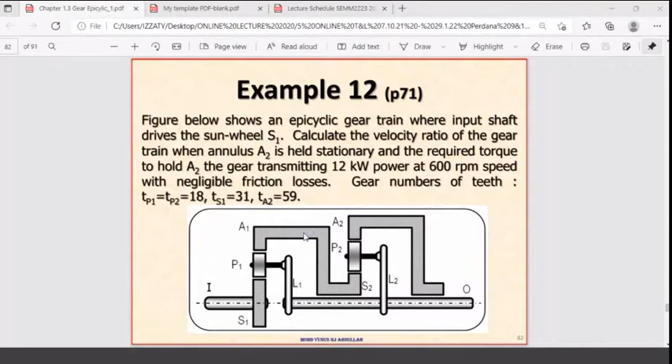Okay, let us now focus on this one. Before that, you have so many worked examples. If you look at your notes here, starting for example number 12, we haven't talked about this one. I know that, but you have ample time to read on your own because you have the solution with you in the books. So if I can, a very quick one, go to look at the solution in your book before we start solving the past test question.

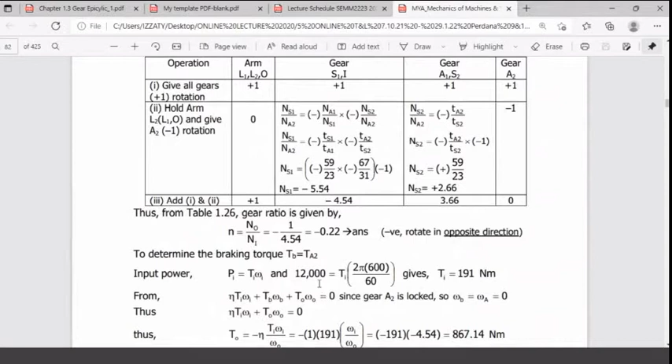You have this one, example number 12. You have the solution with you, and I really hope that solution will help you. And as I construct the solution, as I do the solution, I basically do it step by step, in such a manner that it will help you.

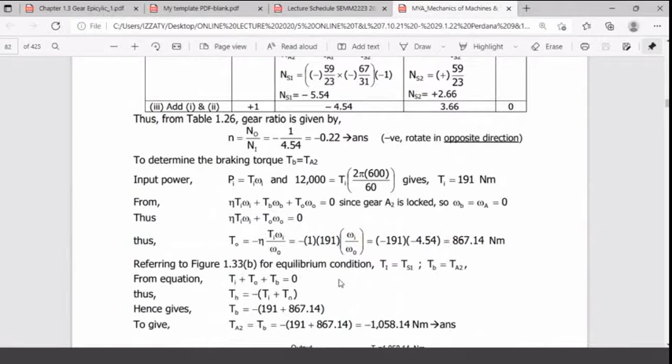And you have this one. This one is very different from other types of gear, as I mentioned earlier. Remember, typically the epicyclic gear will be longitudinally expanding on the x-axis, for example, or horizontally. This time around, it will be expanding radially, becoming bigger and bigger in size.

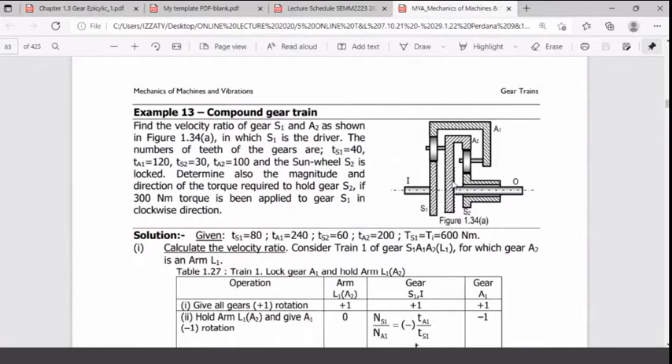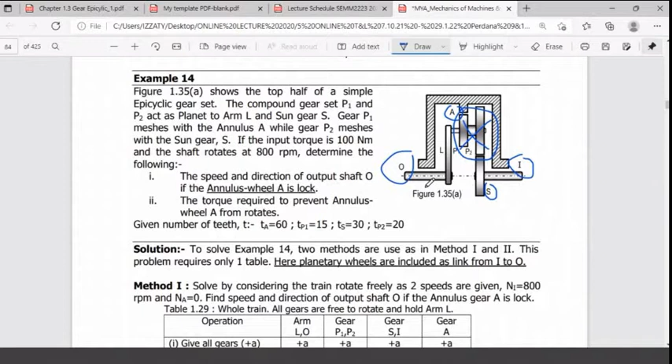And then you also have this one, another part, but this time around, the only connecting gear from A to S, or from O to I here, O to I or A to S, is via the planet. So you need to consider the planet. There is no other way. You need to consider the planet. So if you leave out the planet, for example, you will not get the result of the gear ratio typically. This one you need to consider - look here, consideration of planet.

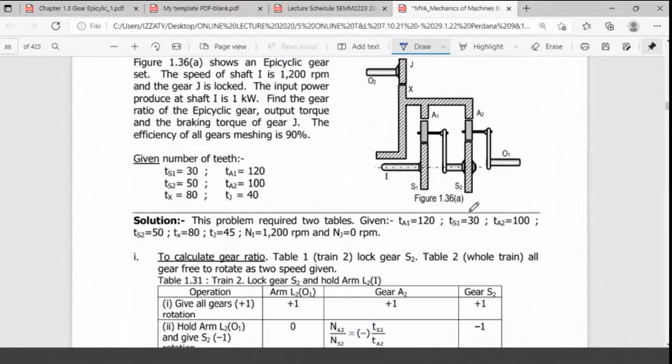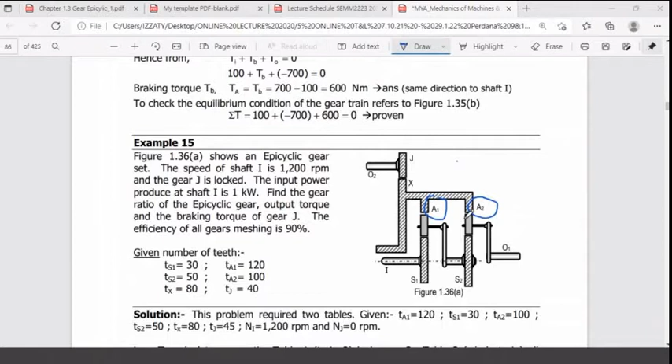And you have another one, this one. This one I think is also coming from a couple of years back in the exam question. You look here, A1 and A2 are part of a single body. It's very rare you find this type of gear where A1 and A2 are one unit, one single body. So you also have the solution with you, and I also provide you an alternative solution - it's not only one solution.

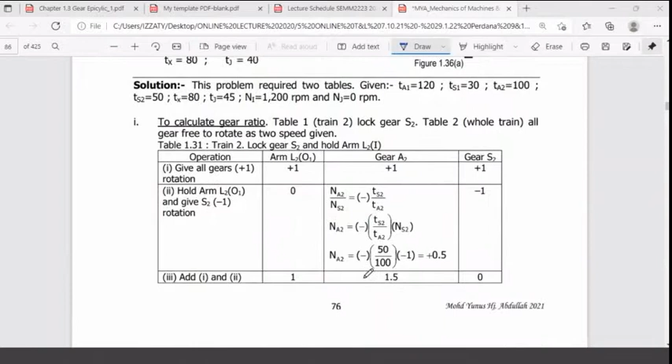And if you check this one, another one - this one is also special gear, also part of the exam question.

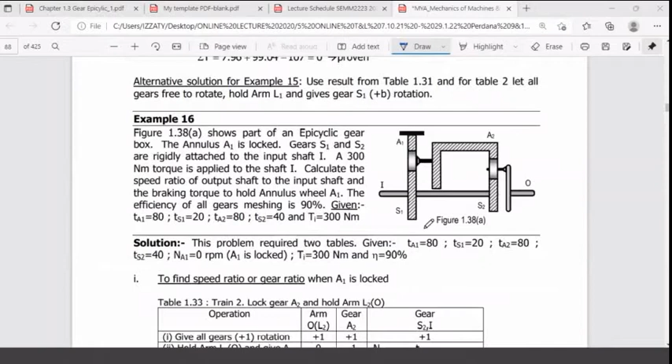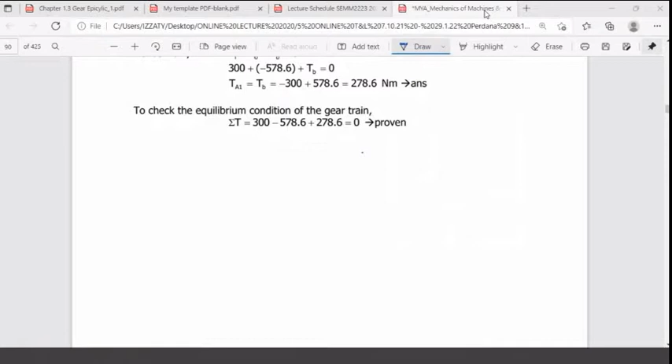This is a lecture schedule. Let me just check the lecture schedule. So I'm going to start with this one.

What I'm going to do is look at the test from the session of 2018-2019, semester 2. We do this one together, yeah? Okay.

Let me put this one. Hold on a bit, I'm going to close so many files being open here. I'm going to close one of the files. So now we focus on this one.

Okay, let's start now. Do this one together. The figure shows the top half of a compound epicyclic gearset with input shaft rotating at a constant speed of 900. This is the input rotating with 900 RPM clockwise, meaning that you have positive here.

So providing input power, they also provide you 5 kilowatt. Calculate the following: first, the speed and direction of the output O. So what would be the O here? We do not know what is O here, and also we do not know what is X here.

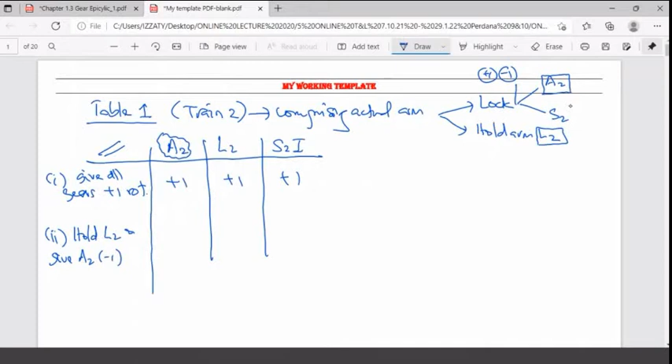So now I'm holding L2, this one becomes 0. So give A2 -1, -1. The minute I put this one -1, so there's no other possibility. This one becomes 0, this one now 0. So this one is +1.

Okay, so your work or your aim now, your objective now, is only to look or to define what is S2.

You have S2, look at here, give A2. So therefore, your NS2 divided by NA2 is equal to TA2 divided by TS2, negative. Remember? And you simplify, solve and simplify TA2.

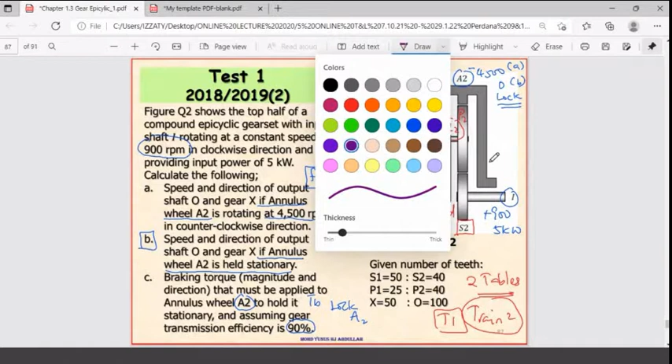And you go back to the parameter, they provide you as such. I left one step. You have to read this one very carefully.

As they provide you planet, this one, you need to use equation one. Remember, TA is equal to TS plus 2TP. You need to use this one because they provide you planet, so you need to use this equation. I left one step, sorry for that.

I also did not read the question, so don't follow me there. Do as I say but don't do as I did, right? So now I'm thinking of calculating TS and TA1 and also TA2 first.

So TA1 is equal to TS1 plus 2TP1. S1 provides you S1, what do you have? S1 is 50 and 25. This one is 50 and 25. Another two, that will give you 100.

On the other hand, you have TA2 is equal to TS2 plus 2TP2. That will give you, go back here, S2 and P2, 40, 40. So this one is 40 plus another 40, multiply by 2. So that will give you 80 is 120.

So you have the results, complete number of this. So you bring it up here. So your, if I can change the color here now.

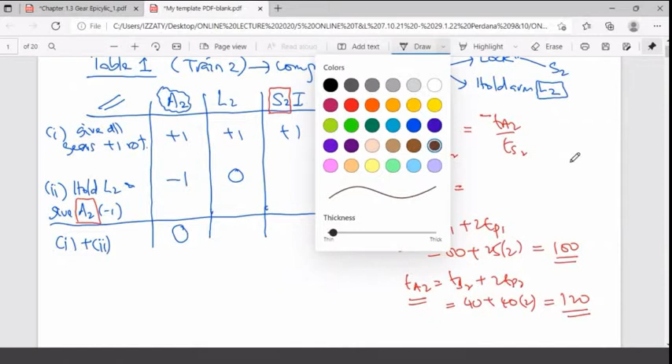We have TA2 is 120 divided by TS2, what do you have TS2 just now? It's 40, negative. This one is NA2.

But remember, NA2, what do you have for NA2? You give NA2 minus 1, put it in minus 1. So it becomes 3, isn't it? So this one, put it in plus 3. This one becomes 4. This one is 1. So that is the result.

So of course, when you complete table number 1, you need to look at what is the result for table number 1. So the result is, so therefore, you can take this one and this one become your results.

Okay, then you have NL2 divided by NS2, NS2 is equal to 1 by 4. Then you keep this one, keep it here, and put it here to be used in table 2.

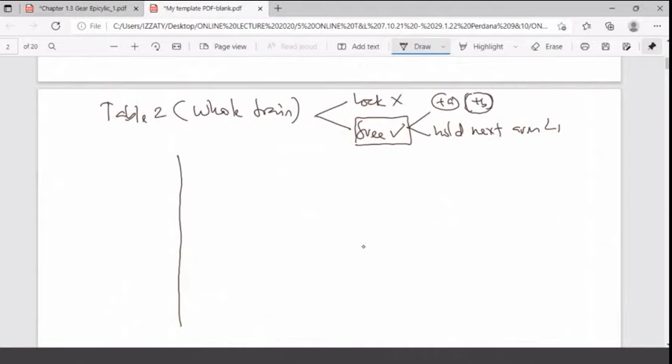Okay, now I'm constructing table 2. Remember, construction of table number 2 is done by extension from table number 1. So what are the extensions? You go back here and look. So you have A2, L2, and S2.

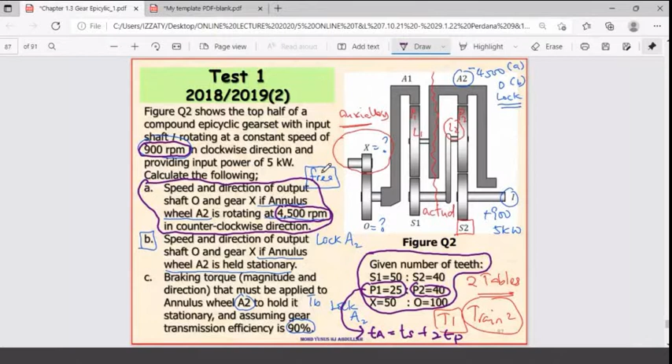So put it here, A2. Follow this one, A2. But you need to check the train, A2. A2 is not standalone. Let me clear what I put here. Look, A2 is not a standalone gear, isn't it? A2 here connected to P2, or carries P2. Can you see my line, class?

Yes or no? So this one, as A2 carries P2, we know that this one is becoming L2. So you put it there. Go back here. Okay, A2 is not A2 alone, sorry, I'm sorry, it's not correct. It's supposed to be L1, it's supposed to be L. This one also is not correct, yeah. This one is P1, then becomes L1 because this one is P2. This one is L2, yeah.

So now you go back here. A2 is not A2 alone, but it is basically L1. Next, what you have next is L2. Put it here, L2, okay, L2. Put it here, L2, go back to the figure.

Okay, L2 here is not L2 alone. If you go back, you move from A2 to A1, you found that A2 is carried by S1. So you put here L2, S1, L2, S1. Is that clear, class?

Okay, then the next one is S2. Okay, you put S2 now. Go back, S2, what do you have? S2 is I, okay, now S2 is I. S2 is I, then you extend a bit.

The final gear is, what do you have, the final gear? The final gear is, go back to the figure, is O. Sorry, A1 and O, so put it here. You have A1 and O, which is not in your first gear, yeah? This one is A1 and O. You have A1 and O.

Okay? So this is the procedure. So anyone would like to ask, how do I select part of gear to become one gear body here? Anyone would like to ask, or does everyone understand this one?

Okay, so now give all gears plus A rotation. We have plus A, plus A, plus A, another plus A. Then number 2, what do you have? You have to hold arm.

But if you hold L1 here, it is not L1 basically. It is A2, because if you go back to the figure, L1 is carried by A2. Okay, so and give.

This one you have choices. You hold L1, you can give here, yeah, put it here. You can give A1 or you can give S1, another choice. So that's why you have to do this one.

What do you call it? Yeah, you have to do this one repetitively to ensure that you understand. Yeah, this is not very difficult. So you hold L1, you have choice to give A1 or S1. Okay, now let's say you give A1, okay.

You give A1, I'm going to give A1, put it, box A1, and I'm ignoring S1 at the moment. So give A1 positive B. So hold L1, this one becoming 0, and give A1 positive B, this one positive B. So that will be the result of the two procedures, which will give you A plus B. This one is A, then the results, of course, this one is 1 plus 2.

So now, this is a bit challenging from table number 1. The reason why is because you have two columns. You do not know where to start first, whether you want to start a column for L2 or column for S2. So as I mentioned earlier, look at the gear that you give rotation.

This one is rotation. So you give A1, look at a friend of A1, is S1. Correct? So you have NS1 by NA1 is equal to TA1 by TS1 negative. Then you simplify, and NS1 is equal to negative TA1 by TS1. This one is NA1, this one NA1 is positive B.

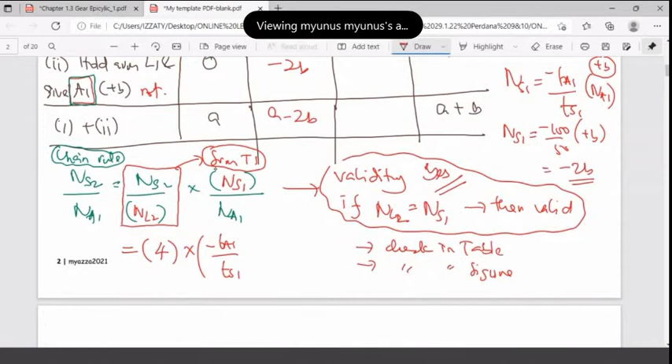This one is NS2. This one already done, isn't it? But if you don't feel convenient or confident about it, just do it another time.

100 divided by 50 multiplied by positive B, is equal to 4 by negative 2b, is equal to negative 8b. Put it here as for your notes, yeah. As for your note, put it here.

This one can also I do a line here. Can also you go back the line here.

But don't do this in your test, this one only in notes so that you can understand. Is that clear, class? Can you follow my lecture? How do I do so many lines and so many marks here? Thank you, Lee. Those who respond, I think are very good for you, yeah?

Okay, now 8. Then you take this one and put in the, you go back here, put it here. This one is negative 8b, a minus 8b. So now you already completed the whole thing. Again, this one, notes and notes.

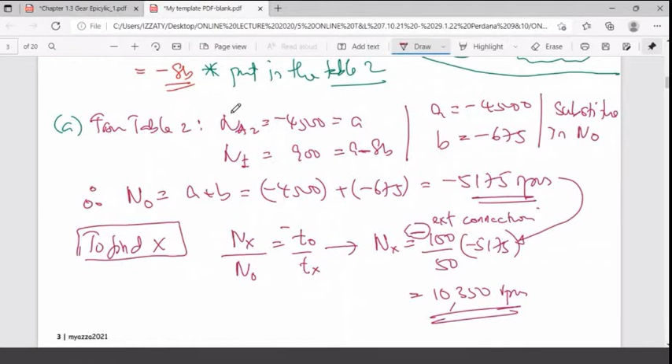Part A. Any question? Now go back, Part B. What does the question in part B say then? Speed and direction of output shaft O and X. Same thing, but now A2 is held stationary. So in part 2 here, A2 is locked.

So solution 1, use table 1. Then you build, use table, then you build. You build table, new table 2, table number 2, this one, yeah. As before. Then you build new table 2, solution 1, yeah, table 2.

But lock A2. Solution 1, solution 2. Use table 1, use table 2. Easy one, this one as before — you don't have to build any table. Use table 1, use table 2. But now you put NA2 equal to 0. So you have two solutions: you can build another one, or you can use solution 2. I'm going to use solution number 2, because it seems very easy for us to play with, or to use the equation to solve rather than building another table, as I mentioned in my class earlier.

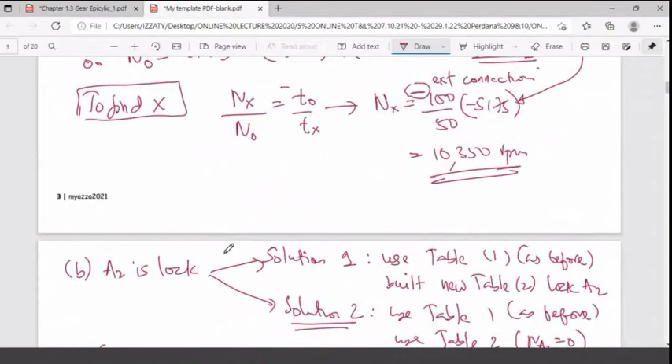So now, if A2 is locked, what does this mean? It means that your NA2 equal to 0. So you go back to table, from table 2, from table just now, what you have is table 2, yeah. Table 2, what you have is NA2 is A, and A2 is A, isn't it? So NA2 is A, put it there, NA2 is A, NA2 is A equal to 0, so your A equal to 0. And NI still running with the speed of 900 equal to, just now, is A minus 8B, A minus 8B. So you'll be getting B here. Okay?

Then if you do this one, yeah, A0, so 900 divided by 8, isn't it? 900 divided by 8, what do you have? 112.5. Yes, thank you. So you have negative 112.5. So this is your B.

So the question asks us to find what? To find O and X again. So use the same thing now. Therefore, NO is equal to, what is NO just now? NO is A plus B. So equal to A with 0 plus this one is negative 112.5. You'll be getting the result of 112.5 RPM, this one negative.

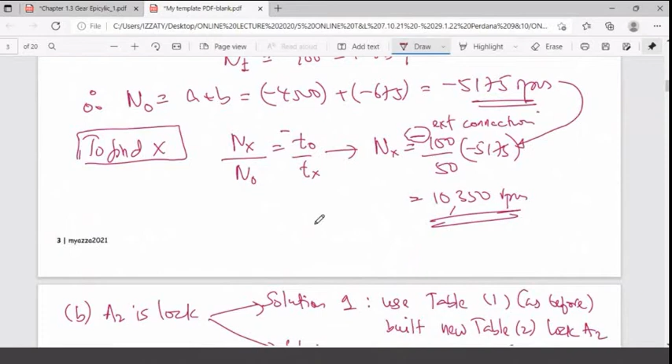Thank you again, Lee. Okay, if there's no question, I am going to move to part, what is the next one? It's part C. This one, remember, this one is torque — the earlier one is kinematic, the next one is kinetic. We're dealing with torque. The question asks about the magnitude and direction of torque that must be applied to wheel A2 to hold it stationary.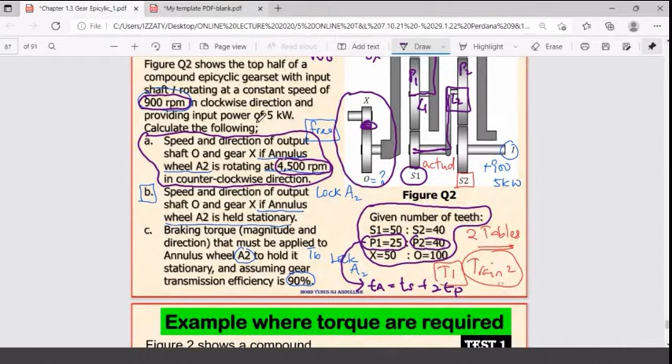Assuming gear efficiency is 90%. So look at it very carefully. I'm going to solve first, then discuss a bit about that. Okay, now, so lock A2 simply means that you'll be getting NA2 equal to 0. So, and if you go back to this one, yeah.

So put it just so, therefore your N equal to NO by NI, is NO by NI. This one is O, this one is I, the whole gear. We are dealing with the whole gear now, the arrangement of the whole gear.

So you can put in values, your NO calculated earlier as negative 112.5 divided by 900. Let me check my calculator here. 112.5 divided by 900, you'll be getting 0.125. This one is 0.125 negative.

Right? So you can also do this one by saying NO by NI is equal to, use the equation. The equation is from O and I. Look at here, this is the equation. This one is the O, this one is the I. So put it in the equation. Both ways can also be used to solve the problem.

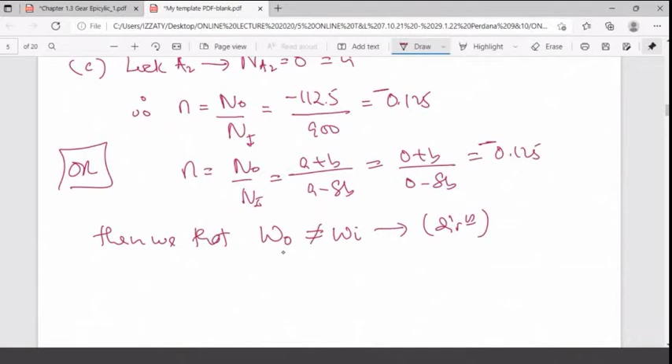This is very important, even though the question doesn't ask us. The reason is why? Then we know that omega O is not equal to omega I. This one in terms of direction. Correct or not? Yes or no? Yes, doctor.

Then you move, then you go further. Construct. Then I'm going to put it there, omega I. I'm going to put here omega O. Different direction, isn't it? And you know well, we already discussed this one so many times in my lecture. This one, omega I and Ti always move or rotate in the same direction, and this one always rotates in a different direction. This one is T, and you found that your TB is the other way around, TB equal to TA.

So equation involved now is equation 1. Remember, you have the equation Ti plus TB plus TO is equal to 0. You need to know what's Ti and what's TO before you calculate TB. So does the question provide Ti? No, the question does not provide Ti.

So Pi is equal to Ti times omega I. So Ti is equal to Pi, I presume this one is in kilowatts. So you will have 5,000 divided by omega I, which is 2 pi times 900 by 60. You will have this one. Anyone, very good, calculating this one in a calculator? Could you please do this one for me?

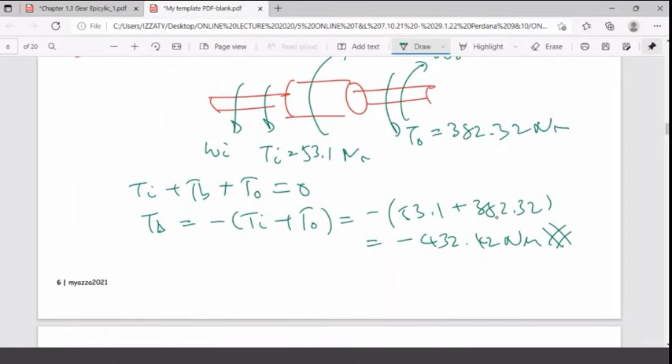Okay, so that is the completion of the whole thing. It takes only 20 minutes for you to solve this one in the exam. This is an exam or test question from a couple of years back, sir. So it's not a very difficult thing.

The only thing is you have to practice and make things convenient, do the shortcut way. The shortcut way we introduce in class is not the shortcut way you learn on your own, because the shortcut way must also be known by the lecturer who marks your work.

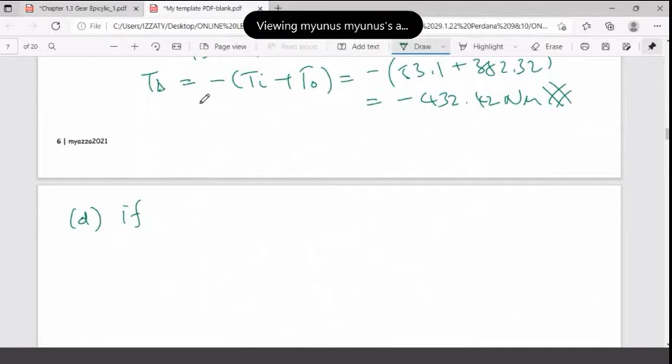Okay, so now supposing you look here, look at the numbers ABC. You have ABC just now. Look at D, for example. You have ABC, isn't it? ABC, now D. Clark, you still with me? Yes, doctor. Okay, now let's say D, what? If suddenly you found it is not A2 to be stationary, yeah? But what if A, look at the gear, A1, let's say A1, it doesn't matter.

If A1 is locked, fine. The top, A1 stationary zone. This one is very common in the exam, yeah. So part of the test goes up to here. This one test, exam gives you another one.

So now, how is it? If you have this one, you cannot use the result from C. No, you have to calculate the new results now. Understand me?

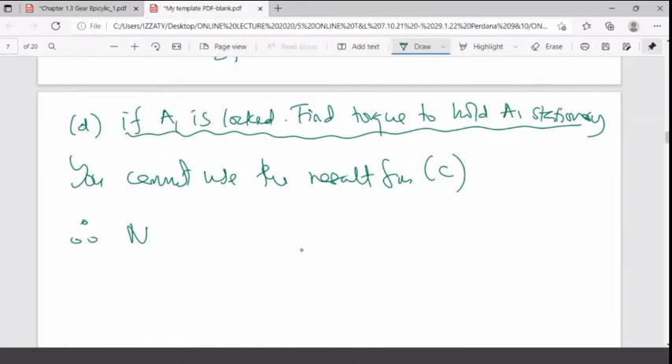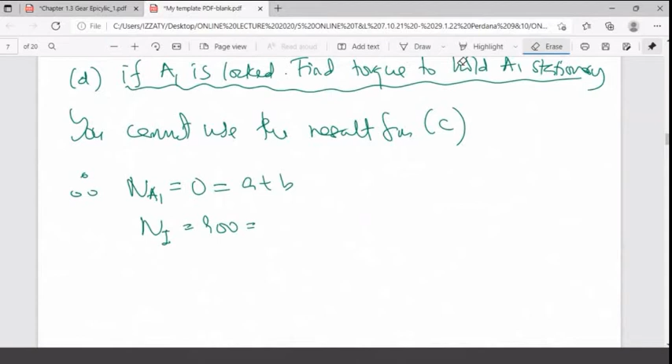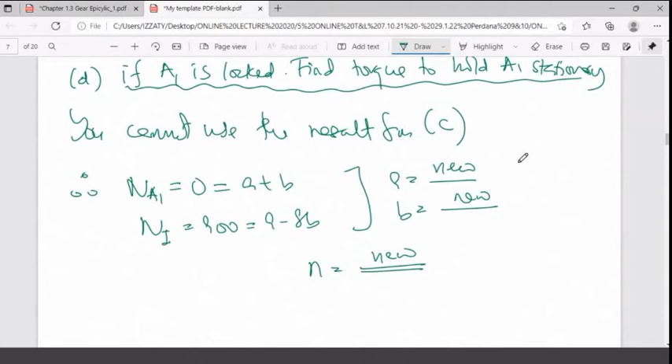Is A minus 8B, if I'm not mistaken, isn't it? So you'll be getting a new A, you'll be getting a new B, and of course you'll be getting a new N. Understand me or not? Because this time it's not A2 lock, it's A1 lock. You have to do another calculation. This one new, this one also new, this one also new.

Okay, then the procedure is the same. Next one, the procedure is the same. Next is Ti plus Tb plus To, same. The next one is this plus this, also same. This is the only difference: a new A, a new B, and a new N.

Why do you have a new N? Because you need to check whether omega O equals omega I, or omega O does not equal omega I. You have to prove this one, isn't it? Okay, any question?

No question, we move to the next one.

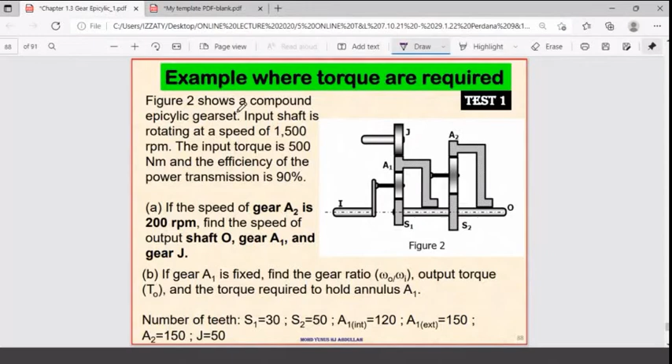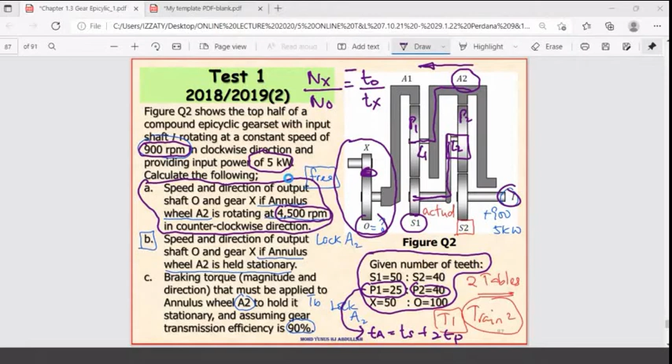You can also, just for the sake of discussion, solve the problem using another option. I'm going to clear this one, it's very messy, so let me put another one. Hold on, let me put this one. What is that? It's the epicyclic, isn't it? So epicyclic, I give you another one, a new fresh one. This one alternative, yeah. Some of you might be very eager to look for an alternative. So this is the alternative.

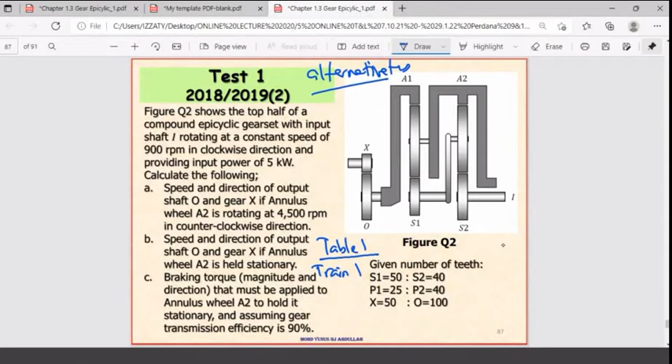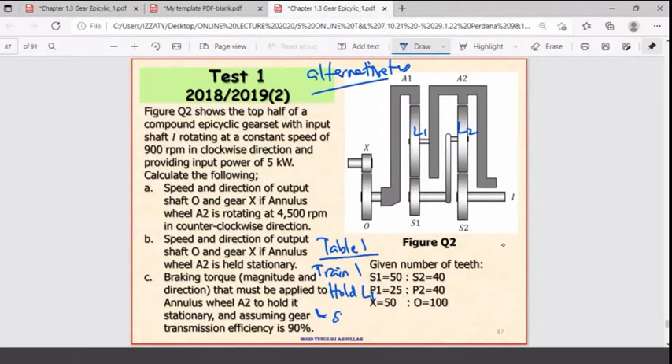So alternatively, you can also use table 1. Look at your table 1. Table 1, you have one. Table 1, you still thinking of train of 1. Now table 1, train 1. Table 1, train 1, try this one. Table 1, train 1, but as you look at train number 1, you hold L1, hold L1, hold L1. This one is L1, this one is L2. Hold L1 and you give S1. Try this one, go back and try this one. For table 2, hold train.

But of course, in the test, you don't do this one. Alternatively, it can also be solved. No, only one solution - this is just to share with you. There is some other method to solve it.

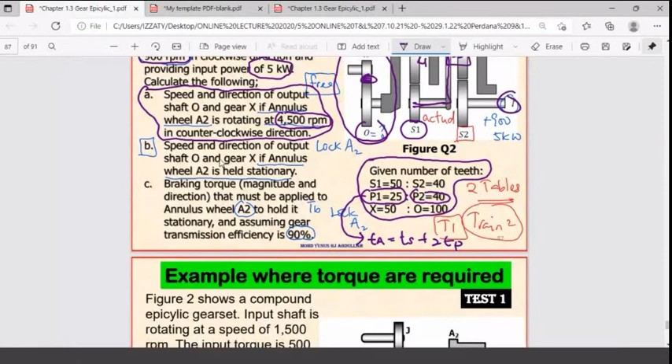Okay, now move to this one. That one is the alternative. Now, this is another test question from a couple of years back.

So what the question asks now is to show a compound epicyclic. Class, are you still with me? Or has everyone left and I'm talking to myself now? Still with me? Yes, doctor. Yes, thank you, Leah. So input shaft is rotating, this one, input shaft rotating with 1,500.

And the input torque is 500. This one is 500. This one is the I, given, much easier isn't it? Because it's already given, this one is an I. And the efficiency of the power transmission is 90. This one, yeah, given the efficiency.

So what we have here, if the speed A2 is 200, this one A2, they provided 200. Find the speed of shaft O. What is shaft O here? Gear A1, what is gear A1 here? And also J, what is J here?

If A1 is fixed, now A1 is fixed. Earlier, just now A2 was running at 200. A1 is fixed, A1 is fixed. Now 0. Find the gear ratio. Look at the gear ratio. Output torque TO, the new TO now.

And torque required to hold A1, torque required to hold A1. This one is very common. I can use the same figure but different equations. So do not memorize the solution. What you need is to understand the topics. So I'm going to share with you this one.

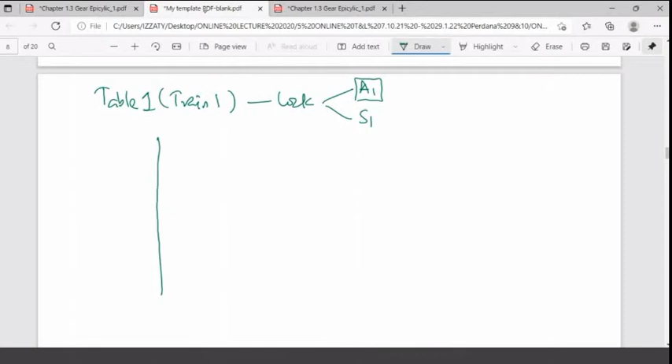Train number 1, so build table. So build table, so I'm going to build table here. I have L1, I and L1. I and L1. I, L1.

Oh okay, student asking me about why I put a bracket here. Okay, I put a bracket here, I and L1, this one. This is my, what do you call it, yeah? What do you call it, yeah? This is my - I don't know whether you like it or not - this one just telling me that I is not only input shaft, but also acting as an arm. If I put here I, this one is something else.

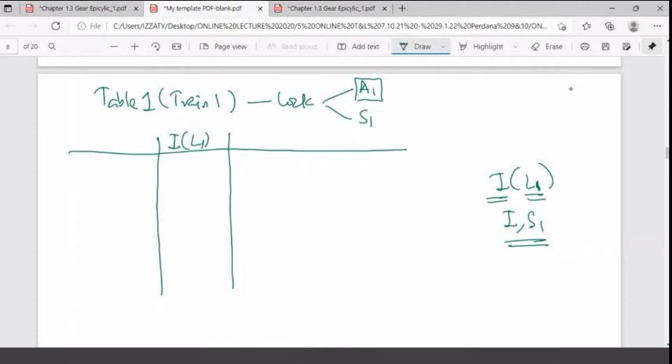And for example, I and S1, for example - this one is different. This one, I and L1 is one body. This one is one body, but it's acting. This one is acting. This one is two bodies, acting in one unit. But it doesn't matter, you can put in anything that you understand and believe. This is what I understand for myself, yeah, and it's easy for me to remember that when I see a bracket, then it's not one function but two functions. Like when you work, yeah, you work as an engineer, but you're also a manager, for example. So engineer cum manager - this one is the input shaft cum arm. So don't bother about the bracket and also the comma, as long as you understand what is the column - this one belongs to one body.

And if I can move to the next one, I do have A1 alone and also S1 alone. So A1, this is my A1. This one is S1. But as I keep mentioning, even though you cut this one into two parts or two pieces, because you put this shaft, then this shaft also O. So S1 is O. If you don't know, it doesn't matter. If you don't put this one O, doesn't matter, okay? You just ignore part 2, you just ignore train number 2. Just focus on train number 1 only. So focus on train number 1 only.

So now, the solution number 1 - remember, when you lock, we have to give +1, we have to give -1.

So give whole gear +1. Now this time around, I'm going to do a shortcut way here. But do not do this one. Do the solution as what you have in your books.

Okay, this is only in my class. 1 plus rotation, so +1, +1, +1. The other one, you hold which arm? L1, because we are focusing on train number 1 only, and you give A1 just now, A1, -1. So I'm holding L1 here, I'm giving -1 for A1. So it is so obvious, 0 and 1.

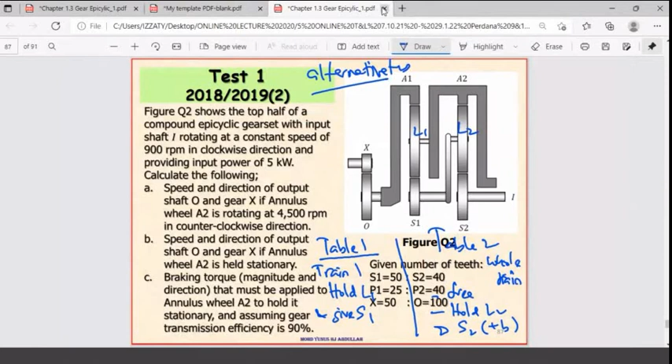Okay, now I'm going to construct table 2 now. Excuse me, I'm going to close this one, leave. Table 2, yeah? So now, table 2. So what do you have for table 2? Table 2, whole train.

And you have choices, you can lock or you can free. But it seems that from what we have here, on part A, you don't have any part or any gear to belong, so you can free the gear. When you free the gear, you hold now L2, the reason is we already hold L1 earlier, so hold L2, and here can give A2, or you can also give S2. Doesn't matter.

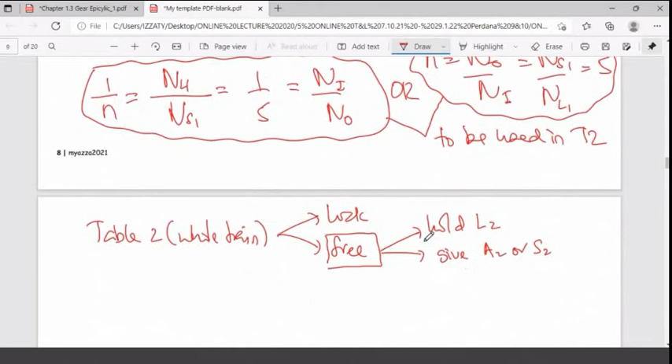Okay, I'm going to construct table 2 now. Table 2, what is table 2? It is the extension from what you have in table number 1. So simply saying that first is I, put it there, I and L1. Put here I and L1.

This one is the procedure, this one is number 1, this one is second column. Second column is what? Second column is A1. So A1, put it there A1 first. Then check what you have. I stop. A1, A1, yeah?

Then you go back to the figure. You check A1. A1, if I can clear some of the thing, it's not needed, yeah?

I basically enjoy teaching face-to-face rather than online because sometimes I feel that I talk to myself because none of you are responding. Yeah, so I've been talking here so many hours. I miss the face-to-face class.

So anyway, come back to this one. We have A1, so you have A1 here. But if you go A1 here, A1 here, and A1 suddenly carry P2. Now A1 is also L2 because one is L1. So A1 is not A1 alone, but also put it in bracket L2. Understand me or not?

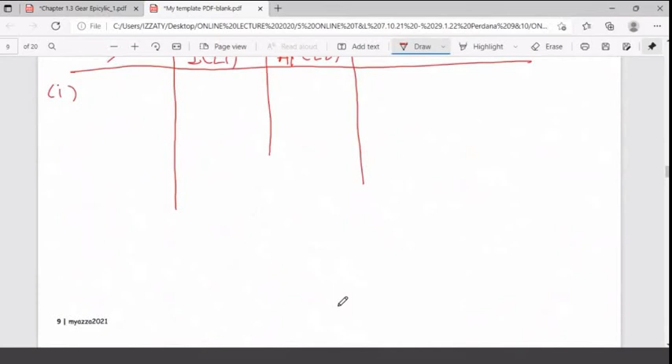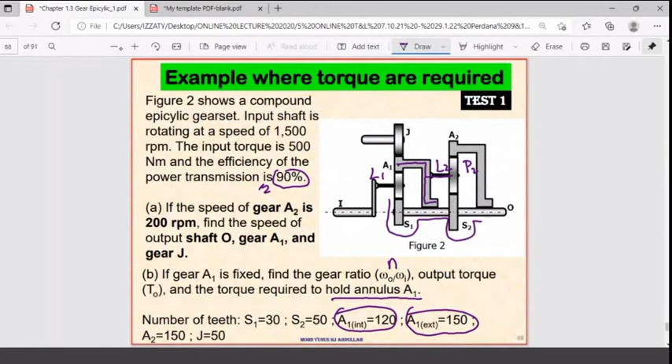Understand me or not, class? Yes, doctor. Okay, then you move. The next one is the next one just now. You have S1, put it there, S1. Okay, S1 and O, you go back to here. S1 is not only S1, it is S1 here, it's S2. Then only you reach O. Then you put it there.

Clear this one, put it there: S1, S2, then O. Next one doesn't belong here because it belongs to train number 2. So go back and look at what is the next one. It's A2, a standalone gear. Put it there, A2.

So that is how you select the part of the gear belonging to one component.

As you fill all the gears, you know you are going to give plus A and plus B variables to the gear. So give all gears positive A rotation. Positive A, positive A, positive A, positive A. And again, don't do this one in the test exam, yeah? Give all gears positive rotation.

Then hold arm, which arm is L2? Why L2? Because the first one already holds L1 here. You have to hold the next arm, which is L2. Where is L2? L2 is here, 0, because you hold the one with no motion.

And you give, what can you give, A2 or S2? I decided to give A2. Give A2 positive B. Most of the time here, you have to make your own decision whether you want to give A2 or S2, okay?

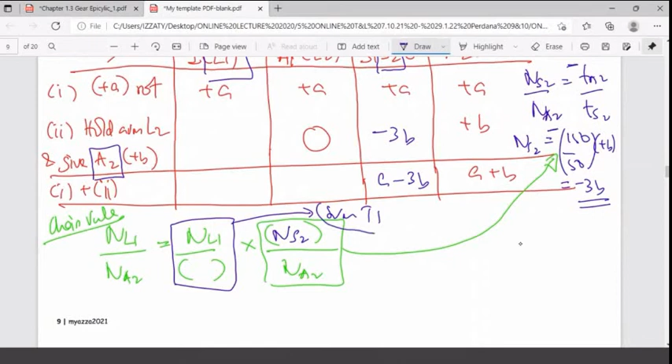From where? Remember, from table 1. Go back to table number 1. What do you have in table number 1? NL1 or NS1 by NL1. What we need here is NL1. So NL1, NS1, put it there: NL1 and NS1. Check. Then you check.

Check what's valid or not. Check, you found that NS1 is equal to NS2, and it is correct. How sure are you? Go back to the column, this one belongs to the same column. How sure are you? Go back to the figure. You found that S1 and S2 are carried by O, and it is correct now.

Okay, so do not cancel this one. If you cancel this, we will bring it back to the initial equation. No point of that, you're not helping. So what you do now is look at NL1.

So equal to NL1 by NS1, calculated earlier as 1 by 5. Put it there, 1 by 5. Put here as 1 by 5, multiply by this one, TA2 by TS2. Don't forget the negative. Multiply by NA2, you can simplify this as 1 by 5.

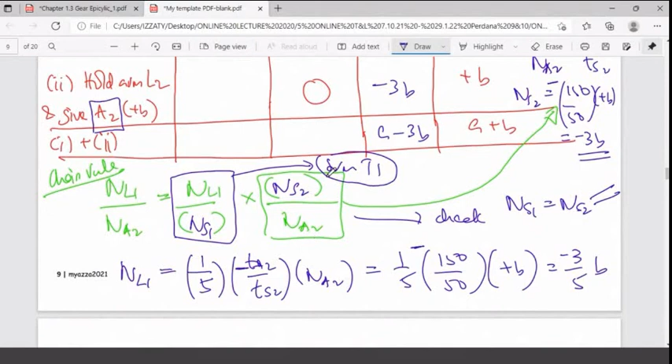This one you did earlier, 150 by 50, negative. This one is positive B. So you'll be getting what? You'll be getting what you have there: 3 by 5 equals negative 3 by 5 B. Put it there, negative 3 by 5 B. A minus 3 by 5 B.

Not so difficult, isn't it? As you complete the whole column, you are basically halfway to the solution. Okay, I would suggest the most important thing is this: table number 1 is the most important thing to start with. The reason is, if you find table number 1 easy, table number 2 will run smoothly like water in a river, very smooth running.

Okay, now the next thing is answering the question. So part A, what does the question ask us?

From table 2, look here, NA2 is equal to 200, go back to table number 2. A2, where are you, A plus B, put it here, this one is A plus B. NI, they provide you NI earlier, what is the NI? If I'm not mistaken, I is 1500, so put it here, 1500 is equal to, so what is I?

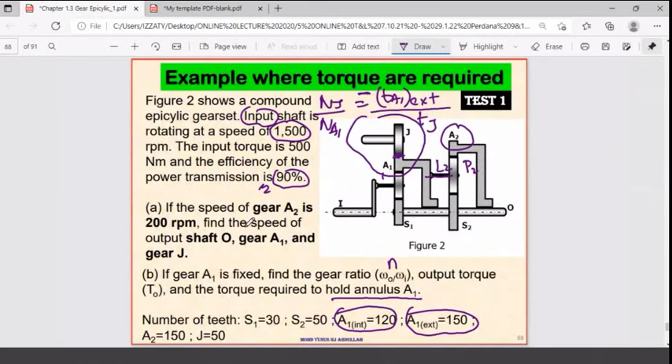Earlier is about A2, it's not locking or fixing any part of the gear. Now you have to lock A1. So you have to what? Now find new A and B. Okay, find new A and B variables. You understand me or not?

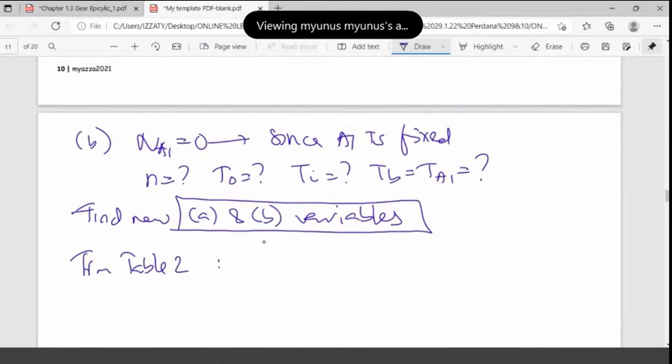How is it? It's not very difficult. From table. Hello, class. Are you still with me? Yes, doctor. Okay, from table 2, what you have from table 2 earlier was what you have for table 2 just now. You have what you have. Table 2, let me check the table 2, yeah, from table 2.

I is where are you? I is A minus 3/5B, right? And the next one, what you have is the NO is the gear ratio of the earlier one, yeah.

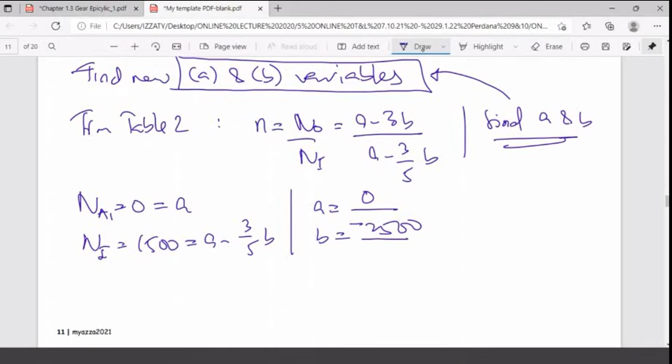Okay, so you can put here N equal to, you have NO by NI is equal to O minus 3B divided by, you have another one is O minus 3 by 5B is equal to, you will have this one. 3 and 3 cancel, this one cancel, put it, this one 5. So this one positive. Or you can also do some other equation by considering what is O here and what is I.

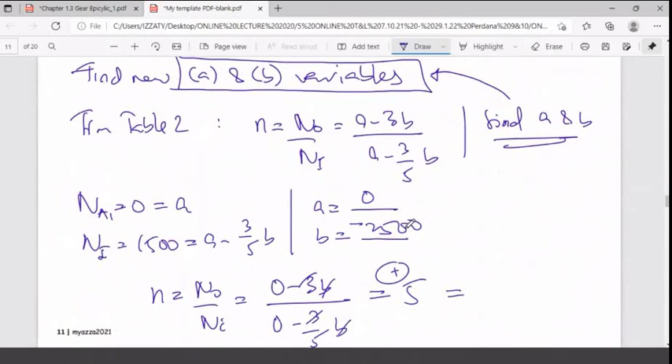For example, yeah, O is, look at NO. What do you have for NO? NO is equal to A minus 3B. So you look at A minus 3B. So you look for NO here. NO is equal to A minus 3B.

And the other one is NI equal to 1,500. This one, put A equal to 0, B equal to just now negative 2,500. Then you get the result. Same result, inshallah.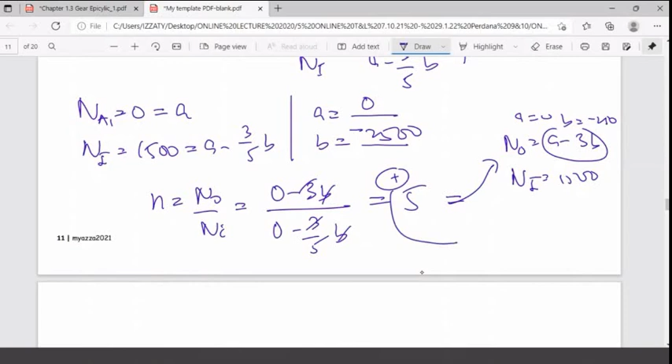Okay, so this is very important. So as you get this one positive, you know that omega I is equal to omega O. This one in terms of direction.

Okay, then you start. Okay. Ti plus Tb plus To equal to 0. Ti, they provide you Ti just now by 500 Newton meter. To, need to find To. So this one provide, need to find To.

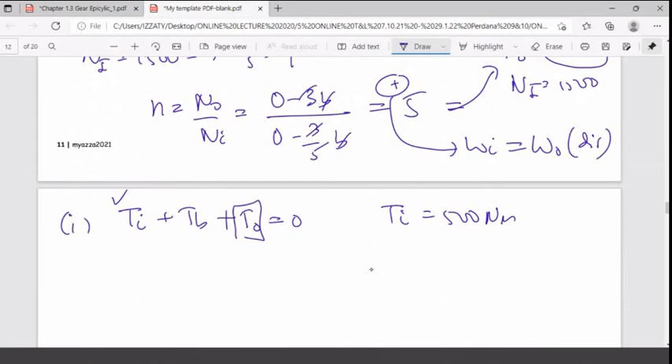This one equation, second equation, we have the efficiency: Ti omega I plus To omega O equal to 0. Simplifying, To is equal to negative FNC times Ti, this one you'll be getting omega I by omega O equal to 0. What do you have for this efficiency?

If they do not provide you, take 100, 0.9, 500. This one is I by O. What you have is O by I. This one is basically 1 by N, isn't it? 1 by N. So you can put this here 1 by 5.

So you have Ti, To. Therefore, your Ti plus Tb plus To is equal to 0. Then your Tb is equal to, if I can put the numbers first, or the value, Ti is 500 plus Tb, what you need, this one is minus plus minus 90 equal to 0.

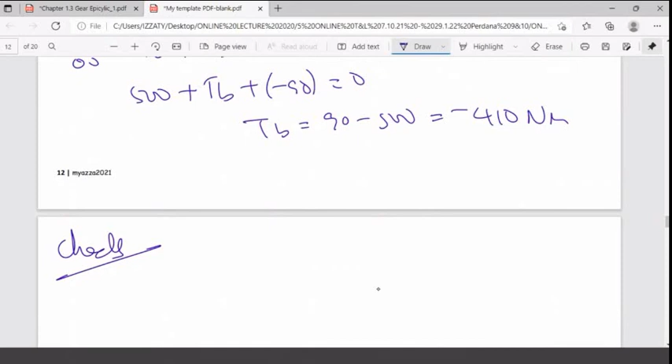Then you check. How to check? Construct the figure.

So we already done earlier that omega I is equal to omega O. But remember, the torque is always running the same direction, up, down. This one is Ti, this one is running the other direction.

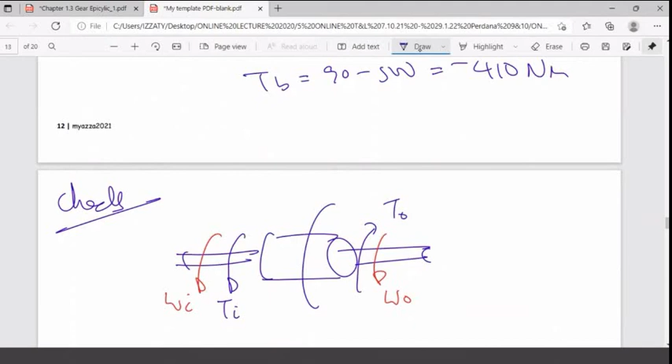So very different. You want to construct or to define what will be the TB now, unless you know the figure. So now we already calculated this one 500. This one already calculated 90, isn't it? So where will be the TB now? Or where will be the TA1 now?

It must be here. Am I correct, no? This one must be TB equal to TA1 equal to 410. Then it will be in equilibrium condition.

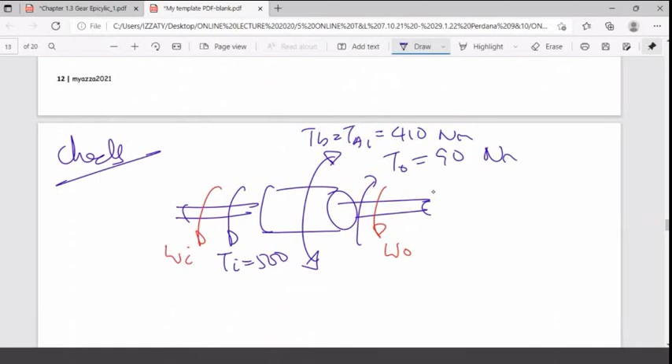To share you one thing. Is it clear now, class? Yes or no? Hello? Doctor, thank you, thank you.

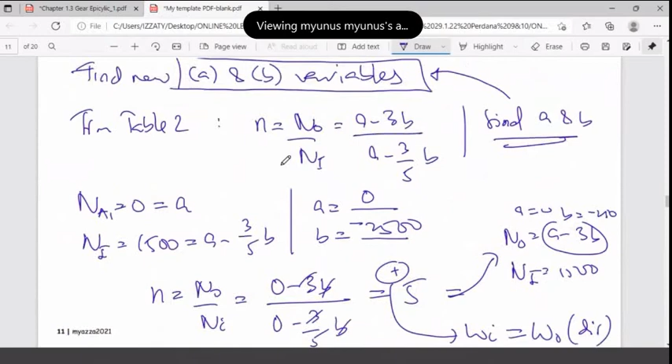So instead of give A2, you can give S2. If you do not get the result, for example, yeah, don't worry. If you don't get the result, you go back to table number 1. Try that one on your own, yeah. Try that one on your own. Let's try, correct or not?

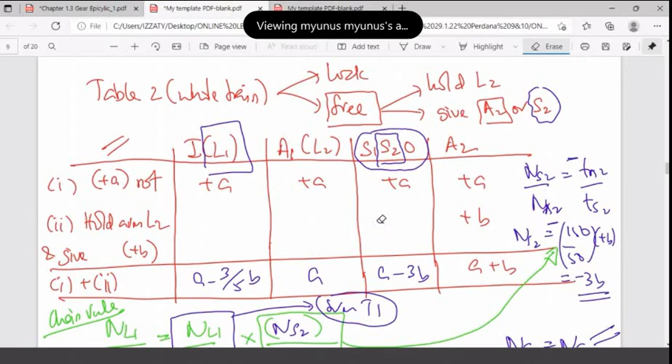Hello? Yes or no? Yes, doctor. Thank you. Is that Lee? Yes, doctor. Yeah, thank you, Lee.

Okay, now. I'm going to give you an idea on this one. As I mentioned earlier, you have choices right now. Instead of giving A, let us now start giving S2. So hold L2, still hold L2, correct? We give S2 positive B, positive B. So you have A plus B, correct? Then you will have a problem here.

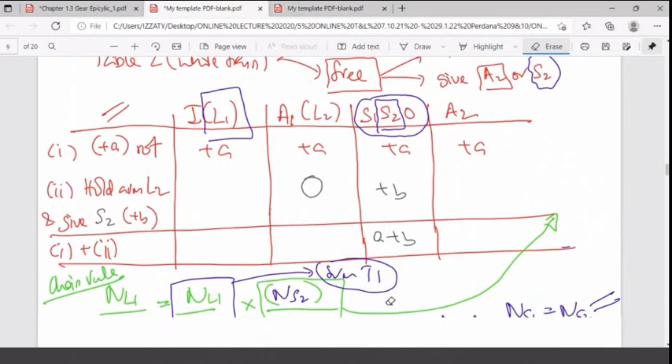A bit more, yeah. Only you have another 8 minutes. Don't worry, I'll be finished up before 9:50.

Okay, now. So what you have now is, okay, sorry again. This one you have to clear this thing. This one is S2, isn't it? S2, S. Okay, now you have S2, whole S2, yeah, correct. You have S2. Look at the friend of S2, it is A2.

So you have Na2 by Ns2 is equal to Ts2 by Ta2, right? So of course you'll be getting here Na2. Na2 is equal to, put it negative, don't forget. S2, what do you have for S2 just now? Is 40, isn't it? 40, correct? And your A2 is, what if A2?

If A2 internal, yeah, is 80. And multiply by your S2 is positive B. And this one is negative. So you have negative 2B. A minus 2B. That is not so challenging. The challenging part will be here.